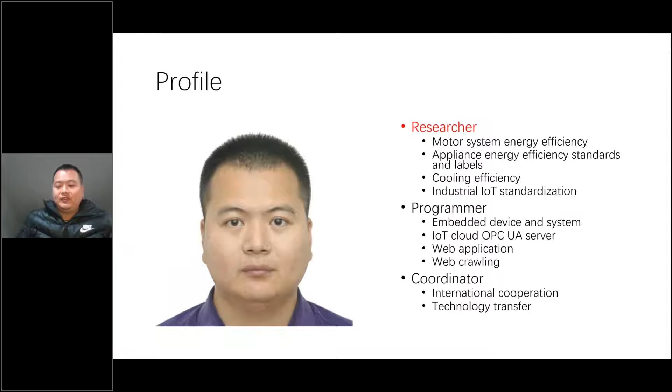But for today's session, I will see myself as a researcher. In the next few days I will be a programmer, and I hope that my presentation can benefit your thinking.

And this is the table of contents I'm going to introduce. The first one, which I already highlighted yesterday, is that motor efficiency is the key approach. That's what I always highlight, and not only me but also Conrad and Rolf and other energy efficiency experts emphasize that motor system efficiency is a key approach. Second, from my understanding, is training.

I think training is the most cost-benefit method to improve motor system efficiency in industries or nationwide. I'm going to introduce a smart pump demonstrator, a good case of international cooperation between China and Switzerland, and give you detailed information on our Smart Pump Demonstrator platform. Then I'll show you the real case, how we can use the pump demonstrator to improve pump system efficiency case by case.

Finally, I will introduce a very innovative international cooperation pattern between China and Switzerland, with national cooperation and local research and development support between the two countries. I hope we can continue such innovative international cooperation in future between China and South Asia region countries. That's a summary of what I'm going to introduce today.

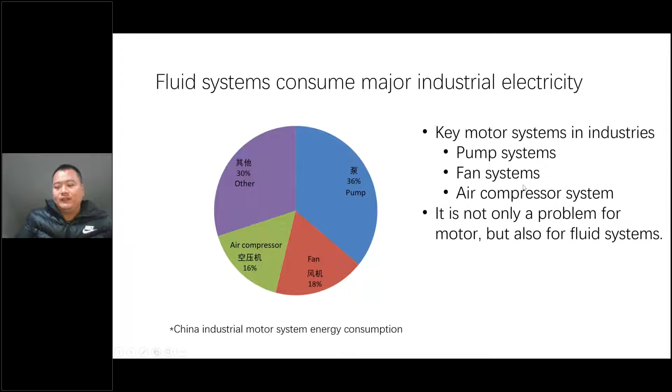This is what we call the system approach, which is a key factor. Motor plays a key role in this process because it's the boundary between the electrical world and the mechanical world. As Conrad mentioned yesterday, it's the split line between IEC and ISO - IEC is responsible for everything related to electricity, and ISO takes the rest. ISO and IEC are working together on motor system efficiency, and I think Conrad is taking the lead for this project.

Then the fluid - water, air, or other liquids - goes through the pipeline, controlled by valves, and finally reaches the end consumer to remove heat, or the compressed air can execute actions and finish whatever job it needs to do. That's the whole chain, and we have to analyze the whole chain to improve efficiency.

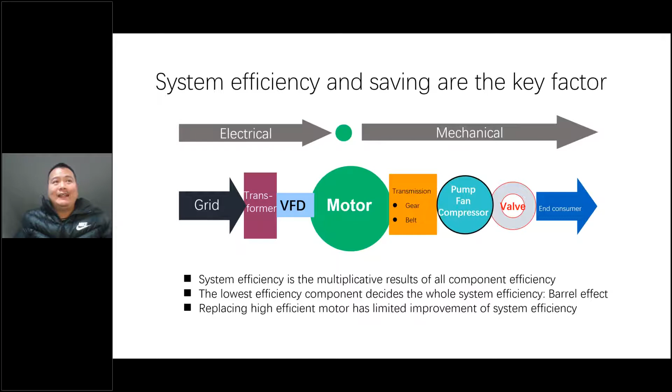And that's the efficiency classification difference between those supreme or normal motors. So that means the improvement of efficiency of the motor is quite limited.

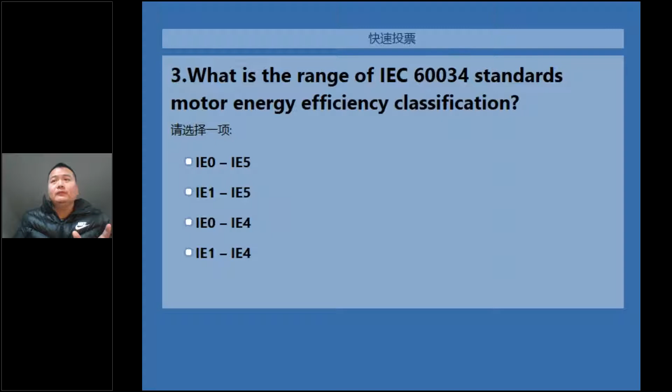I think that's what I always want to highlight in past presentations. But the information I want to send to you is in the last sentence below: considerable energy saving can be achieved at low or even no cost.

That means through training and management, not just by replacing the inefficient product with a high efficiency product, because that requires a lot of initial high investment cost. We have to think about the low or no cost approach.

The next step is how to achieve the goal at low or even no cost. I think, from my point of view, it's effective training.

We did training in factories for the last several years in my city, and also a lot of international trainings. The training with you is one of them.

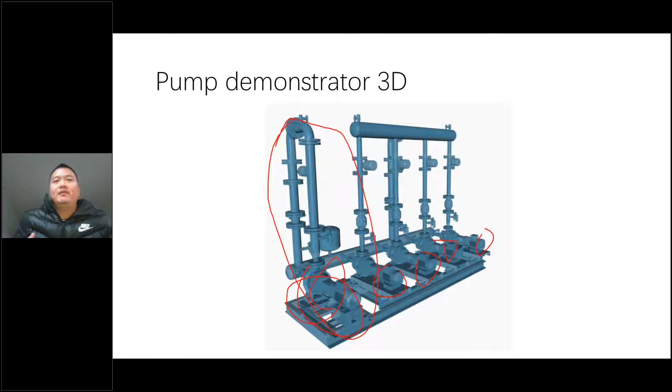That's the introduction of the pump demonstrator, the China version, and this is a 3D model. Maybe this is the real stuff, and this is the dimensional 3D. This is a big pump, and also 4 small pumps in parallel. This pump can run independently because it can run without any problem. Those 4 pumps, in industrial applications, especially for such kinds of ventilation circulation systems, we have not just 1 pump but multiple pumps, giving us the chance to introduce this kind of simulated industrial operation mode.

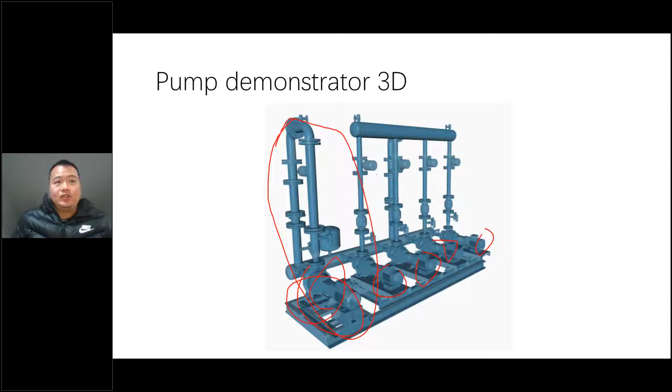Then we can disclose the facts to the students or trainees. Here are small meters, and this is a general pipe for the small pumps. This is a basic design, and also our innovation is called digitalization and standardization.

First, we choose smart meters and sensors. For VFDs, we choose ABB VFDs because we can connect with a Modbus port to sample the data. Then we have a smart flow meter, smart pressure meters, and smart power meters. I'm going to introduce it to you later, maybe not today, I think Thursday. Then everything will be connected to a data gateway.

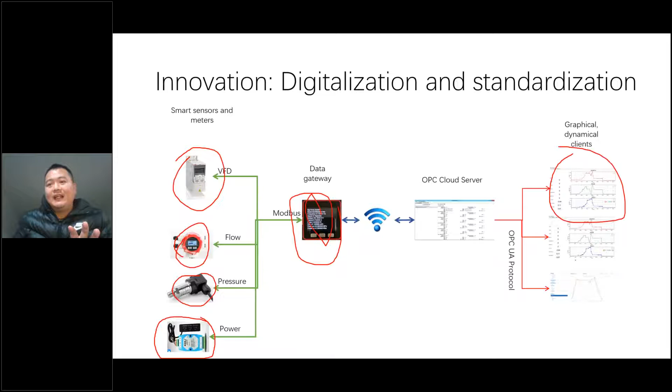We developed a data gateway by our own. Then we transfer the data via the Wi-Fi network to the cloud server. The cloud server receives the data, puts it into the OPC modeling, and then publishes the data to a graphic and dynamic client. This is the professional client, and this is the web client. This is the whole chain of digitalization.

Today I just bring you the framework of what I did in recent years, but in the next sessions I will introduce some specific technologies, especially how Modbus is implemented, and also what the OPC architecture means. I'm going to introduce that later.

I'll check the time now, already half an hour. We built a globally accessible web portal, meaning that from the web portal you can monitor and also manipulate the system remotely.

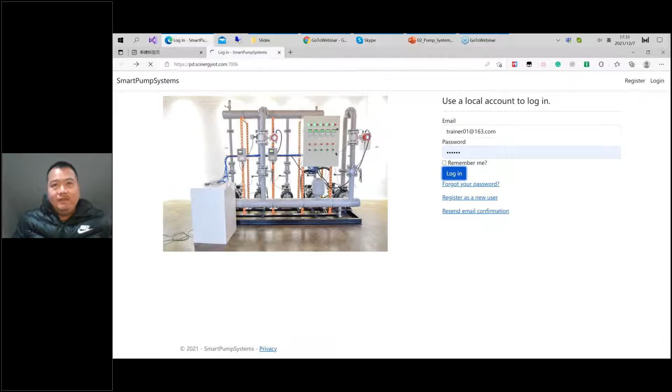First you can find the introduction of the pump demonstrator in text. I explained everything in this short text. And then we can start experiencing it.

Right now we have the instant status. You can see we have the meters, instant meters. We can see the hertz, meaning the frequency of the VFD, and also we have the VFD's power, the flow meter, and the pressure from the pressure meter.

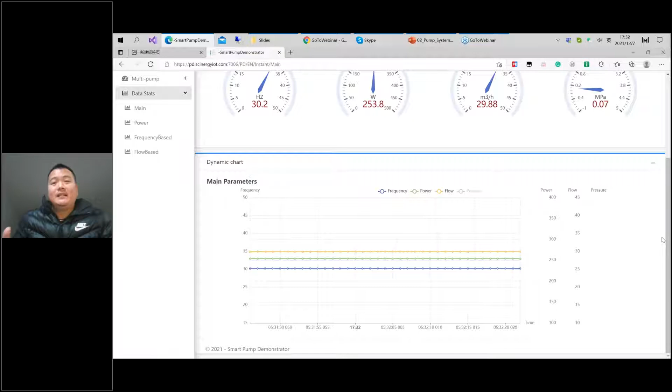On the ground we have the dynamic data, because right now it's not really connected, as this pump demonstrator is migrating from one place to another. I donated this pump demonstrator from my company to my university in my city, so we are migrating it from one place to another.

But here is the difference: for the trainers, we have the management function. The first one is gate management. We don't have the management data, and VFD operation.

But actually, if the real pump demonstrator was connected to the server, I can change the frequency here. Then if I send this, the frequency of the VFD can be changed remotely - that's remote control. I can also turn it on or off, because we have 5 VFDs: one for the big pump, and four for small pumps 1 to 4. That means we can control the VFD.

Second is the PID control. It's not developed yet, but for PID control, I think we can maintain the flow at a specific level. PID control is a very classic automatic technology in industries.

I assume a lot of you already understand what PID is, so I don't want to introduce it in detail because it's a quite broad topic. But from my point of view, PID control is the most useful automatic control in industries. I will introduce it later.

We can also use the simulator, because right now we don't have the physical operating machine, but we can simulate different cases since I already recorded the data from previous operation.

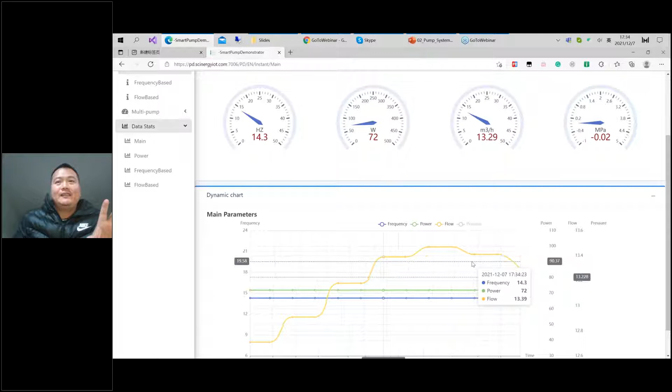The data is changing. We can see that the flow goes up, the frequency goes up, the power goes up, and we can also change the pumps here. Right now the data only applies to the big pump - for the small pumps, it does not change.

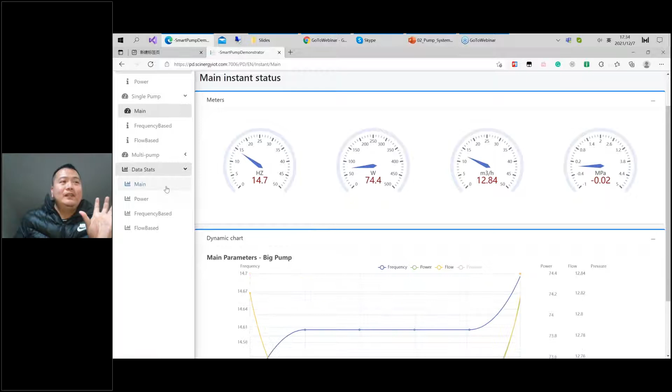We have the virtual meters - you can see the flow goes up. And here is the instant data. That means we have a virtual control panel of the motor systems.

Right now I stopped it for a while, and maybe later it will go up again. I changed it because we recorded that phenomenon maybe a year ago - right now I'm just replaying it. We want to illustrate that when the frequency goes up, the speed goes up, the flow goes up, the power goes up - and what's the difference?

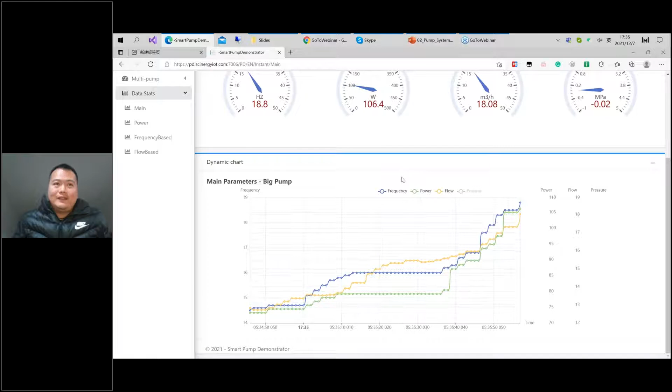I'll show you later, but I just want to let you know this is the training facility with instant data, and we also have the data stats, meaning we can have statistical data. Here we can see that in the last few minutes, the phenomenon of frequency changes, and also power and flow going up.

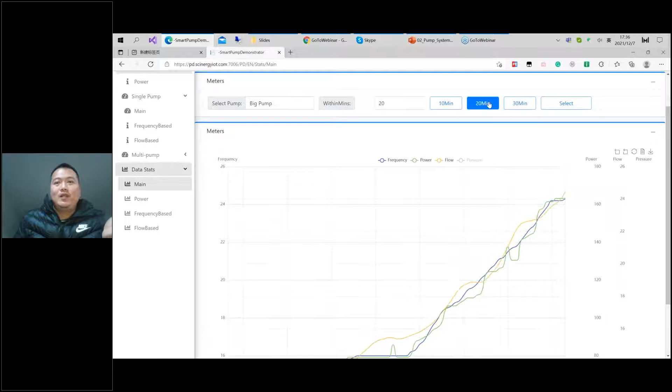If we refresh in 20 minutes, it means in the previous 20 or 30 minutes. But if I change the pump to pump 1, there's no data there. If you change to the big pump system, we can see it in 10 minutes, in 20 minutes. And then for this, we can zoom in to get a detailed understanding of the data.

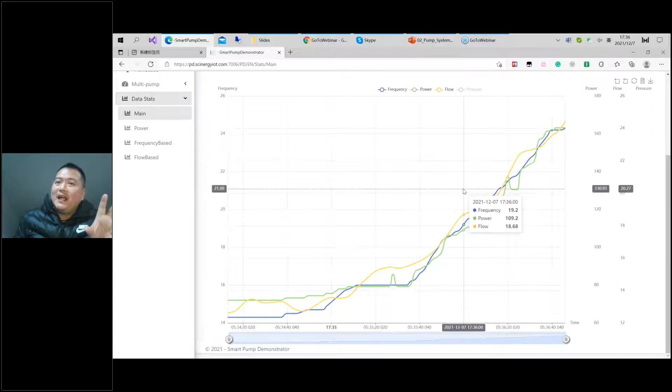We want to know something behind the data, so we can show the data view - that means how the data goes up. That's the raw data of the chart. You can export it to Excel for further analysis. I think that's an advantage of modern technology and also the IoT technology.

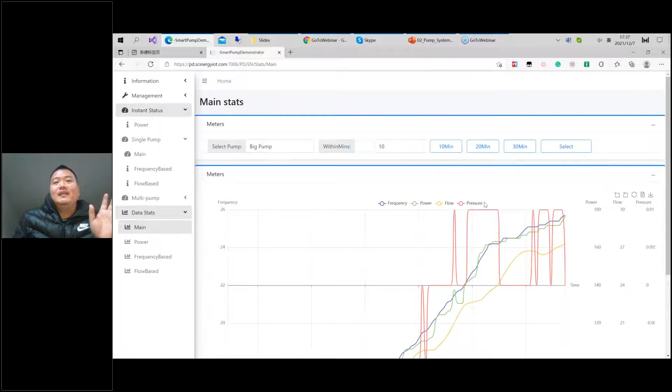I'll go back. It's a web platform because the pressure meter is so strange - the accuracy of the pressure meter is not as precise as possible, because if we want a very high accuracy pressure meter, the cost is really high. We cannot afford such a high cost pressure meter. So we decided to use a cheap and acceptable pressure meter to get the data.

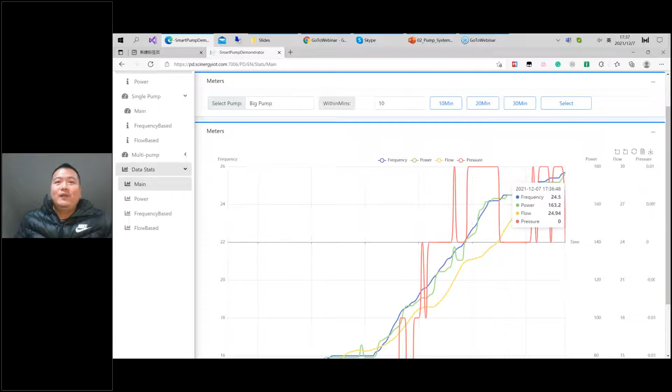Then we can also turn it on, turn it off. Here is the legend of the line. If you don't want the frequency, just click and the frequency will disappear. And also, if you don't want to see the power - and if you see the power, okay.

I think this is a very good training facility. I hope that you can experience it a little bit, and then you will find the message - more message on that side. Then you can train the people with the training facility.

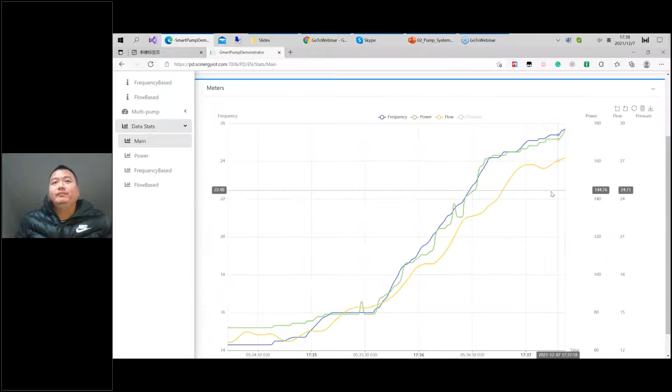But for the normal user, you don't have that option here. That's a management function, and you have to contact me to authorize you as a trainer. Then you can use this system as a trainer.

The most important thing is to change the simulating curve of the system, because one curve takes about 10 to 15 minutes. Right now we have about 9 to 10 cases. You can use these 9 to 10 cases to train people to better understand what a real pump is. Okay, this is a training facility.

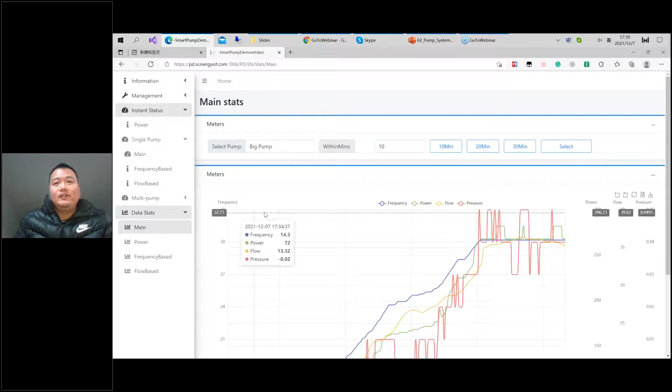I will leave it alone for some minutes. Then we can find the very good curves of system operation, and then we can explain in detail. Actually, I took this classic example of how first the pump goes, the frequency goes up, everything goes up.

Then I keep the frequency and use a valve to control the flow. You can see the phenomenon - how if we change the valve, how the flow and the power change. Then if I change the frequency again back to 15 hertz, how the flow and the power go down. Then we can really experience why VFD can save energy by changing the speed.

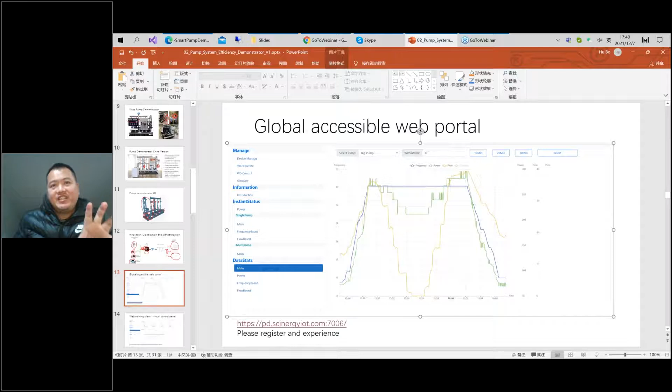Okay, this is the web portal, and this is the virtual control panel. Right now we have about 50 trainees. 50 people can see the screen, because we cannot use webcam live video for each meter to all of you, but we use this kind of virtual control panel. You can experience the real operation of the system.

Let me show you - this is instant data. You can see it's like a virtual power, virtual gauge. Okay, interesting.

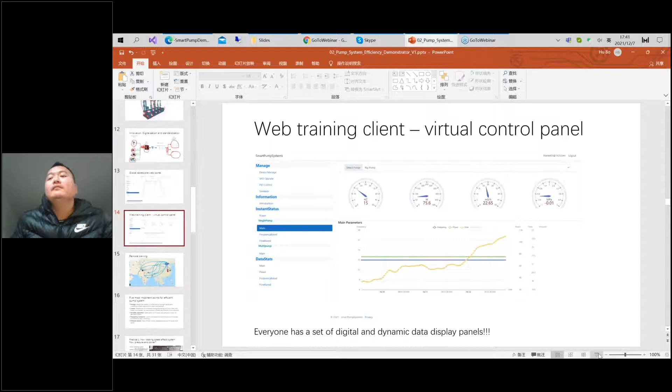Then we have the real capacity of remote training. Let me show you geographically - this machine is located in Zhenjiang, a small city near Shanghai, in the east of China. And I'm the trainer, located in Zhenjiang, but my cloud server is located in Beijing, maybe somewhere else in the world, maybe Hong Kong or Shanghai again. But I provide you a web portal - everyone all over the world can access it.

Here in Pakistan, you can have trainees from India, from Nepal, from Bangladesh. And also in future, if you are the trainer, we can have a trainer in Pakistan or India use the training facility in China to train people in the South Asia region. Of course, in future you can build your own training facility physically in Pakistan or India, and train the people at the local regional level. I think that's the concept of trainer.

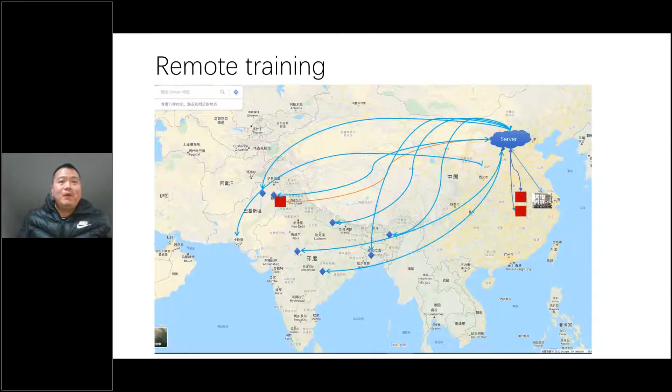So today I'm not only training people on pump demonstration, but also on the concept of how we can train trainees in future. You will be the trainer in future - I hope that you will be the trainer, not only trainees, because we cannot train people by our own, one by one. We have limited capacity.

After the training facility, right now we go to the efficient pump system. I took these 5 points from the training material on pump system efficiency - we summarized the 5 most important points for a very efficient pump system. The first is design.

A lot of designers or pump system designers always oversize their product. But the most important thing is we have designed the system in proper application conditions, because we have to decide the water requirement and head requirement for the system. Maybe at the very beginning we cannot get the requirement precisely, but after the facility has been in use for years or some months, we can figure out the real demand for the system and consider redesign. Redesign is most important to improve system efficiency and energy conservation.

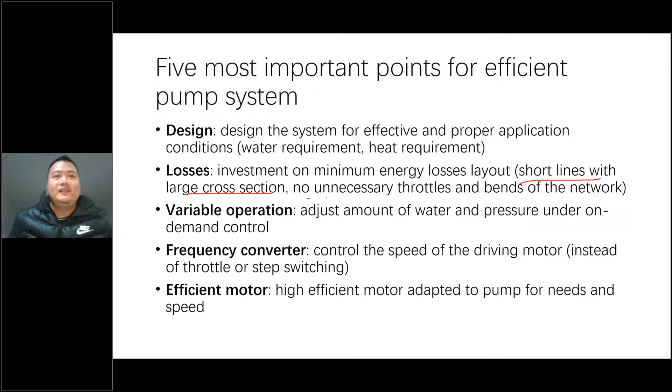Second, we focus on loss. We have to invest in a minimum energy losses layout. Here we don't touch anything about the pump or the motor, because we are talking about lines, the pipe network, cross section design, to cut the number of throttles, because we control the valve and also the bends of the network. We have to reduce the loss as much as possible in the network. We won't mention the system again.

The third one is variable operation, because in a lot of cases, due to temperature changes with seasons, daytime and nighttime, and different production demand, the demand from the pump system also changes. That means the pump system has to be operated under variable operation conditions, so we have to adjust the amount of water and pressure based on demand control. The best or most popular solution currently is VFD. I think the ABB colleagues will introduce this later today or on Friday.

Finally, we have frequency converter control. We control the speed of the driving motor. We don't have to use throttle or step switching to control the output.

The 5th step is we have to replace inefficient motors with efficient motors, because we can use a high efficient motor adapted to the pump for the load and speed. Later I will explain. Right now, I have one question for you to consider: can we achieve the energy conservation goal by replacing an inefficient motor in pump systems with a high efficient motor? You can think about yes or no, and later I will disclose the answer to you.

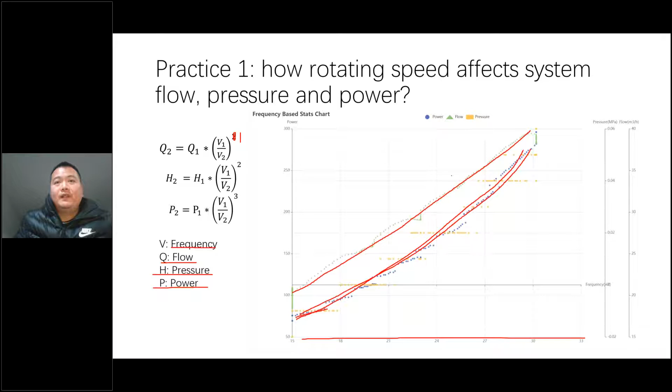With this you can see the blue dot, and the x-axis is frequency. I think the blue dot and the green dot represent the flow going up. Then the pressure, even though the accuracy is not very good, still goes up, and also power goes up. Okay, and this explains this phenomenon.

The second question is: does replacing an inefficient motor with an efficient motor save the expected energy? For the pump system, I think my answer is no. Here is one example from the pump demonstration show.

Here is the operating status when the frequency is 20. At this frequency, the power is about 130 watts and the flow is about 30 to 30.3 cubic meters per hour. If we replace the inefficient motor with a high efficient motor, normally the high efficient motor has 3% higher speed. That means the frequency of the system will go up by 0.6 hertz. Then the flow goes up by 0.3 cubic meters per hour, and the actual output power increases to 141.

That means right now we have 12 more watts of power consumption if we only replace the motor with a high efficient motor for the pump system - only for the pump system, also for the fan, but not for the air compressor or other mechanical motor systems. For the pump, for the fluid system, replacing an inefficient motor with a high efficient motor causes the rotating speed to go up, meaning the total output power goes up.

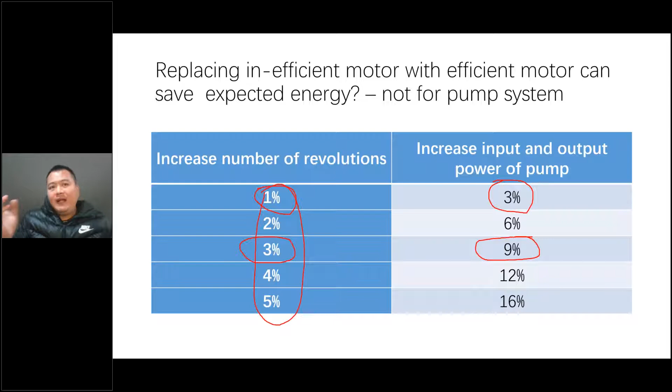It's from the material - that means the increased number of revolutions for motors could normally be 1 to 5%. The increased input and output power of the pump is not linear, it's a cubic proportion. If we increase the rotating speed by 1%, the output power will increase by 3%. If we increase this by 3%, then the power increases by 9%. Actually, I invite you to make a general calculation.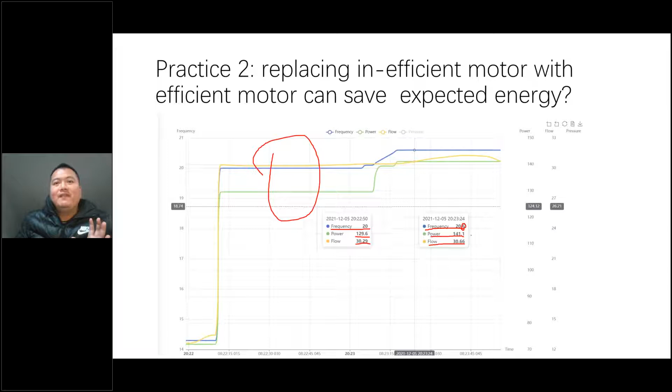Now, how does valve control affect flow, pressure, and power? We have different sections here. When the frequency - the blue line is the frequency - goes up, the flow, shown as the yellow dot, goes up, and also the green goes up. When it reaches 30 hertz, because this is a laboratory I don't want to reach the limit of 50 hertz, I think 30 is good enough for demonstration. Then I stop changing the frequency.

Then I start throttling this, using a valve. The opening rate goes from 100% to 90% to 80%. Then it goes down, down, down, down. Finally I almost close the flow, throttling it all the way to zero flow. This flow is zero actually - this is a line at 0 here.

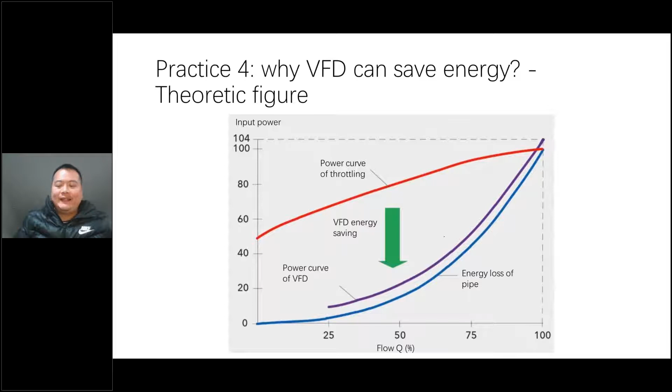Theoretical figure - Rolf showed this figure yesterday with some theoretical analysis. He explained this in detail, so I don't want to repeat again. But this is the real world. With the pump demonstrator, we can show people how the energy can be saved. This is the line of the VFD, this is the line of the throttling, and the difference here is the savings. We have a similar curve, but not the same, because theoretical and practical have differences.

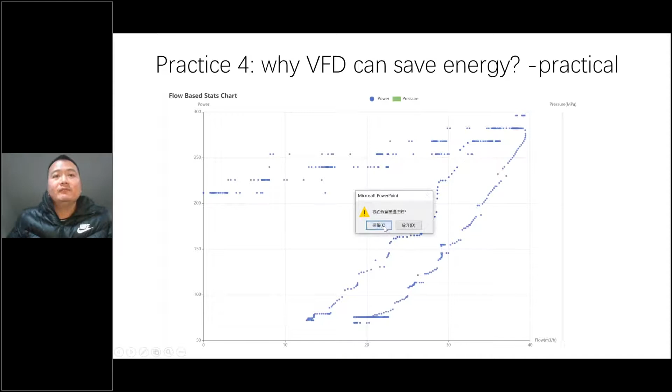Okay, and this is a new version. It's a new version actually. Right now I think our system here is operating in a quite well situation. I think we can repeat this curve again. Okay, right now we have the pressure. We can see that when we use VFD to control the system, the pressure goes up, and then the pressure stays the same, and then when we shut it, it goes down.

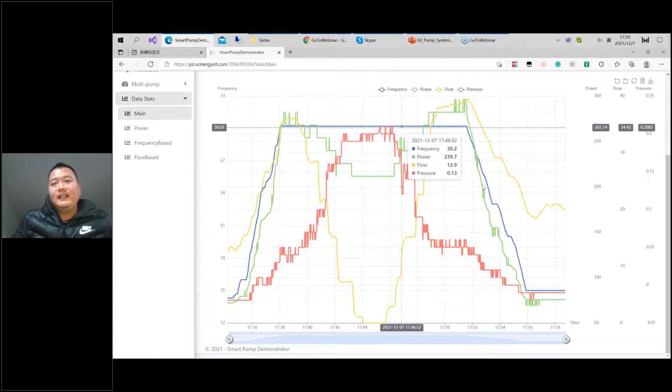It's almost the same. I just made a screenshot of this phenomenon, and here you can have some data to show you. At this point, you have frequency of 30, power consumption 239.7, and here you have the frequency of 15, and also the power down to 75. The frequency only changes 2 times, but the power goes down 4 times. It's not theoretical, it's practical. It's from the recording of the system operation.

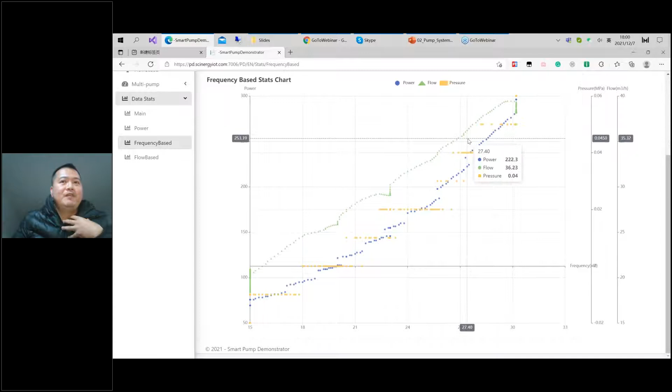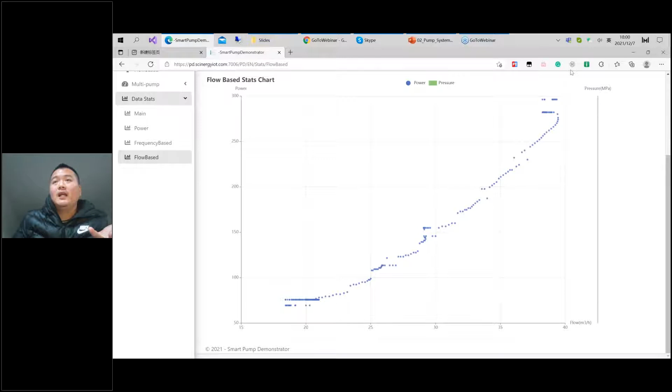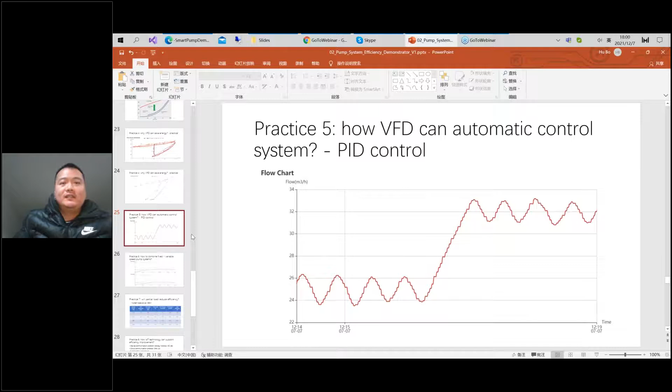Okay, I think we demonstrated practice 4, and also this is practice 5 - how VFD can automatically control the system. That's PID control. I didn't include this for the phenomenon, but I can explain: I set the system like 25, then the VFD will change its frequency, trying to maintain the flow around 25. It goes up, it goes down, goes up, goes down.

Then I change the setting to 32. Then it goes up, step by step, by 0.3 Hertz. And then when it reaches the target flow, which is 32, it will keep like a very regular curve. You can see that the PID control always tries to maintain your system in a stable way, because the control interval of this is about 1 or 2 seconds. That's why there is always a plus minus 1 difference between different points.

Plus and minus 1 difference. But if we want to control the flow in like 8 to 10 seconds to change the frequency, we have to change the parameter. We can see that the curve will be almost flat. I didn't record the data this time, but I'll just tell you that if we change the parameter of the PID control, then you can have a very good, stable control of the system.

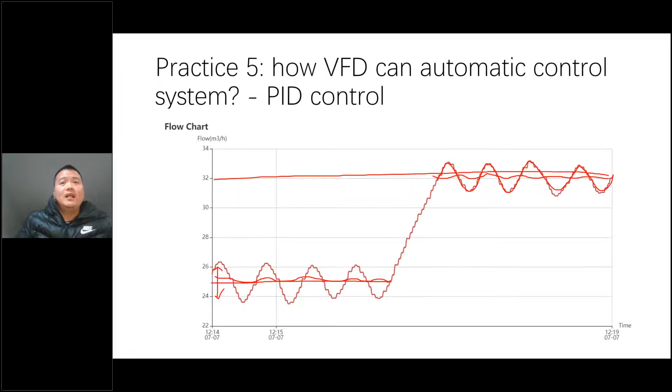I think this is the process. I think the last one is - because right now we only illustrated for 1 pump, but actually we can use multi pump. In a lot of cases, we have 1 constant pump, a fixed pump to provide the base load, but we have a variable pump to provide the variable speed control to meet the variable demands of the system. And right now we have 2 pumps.

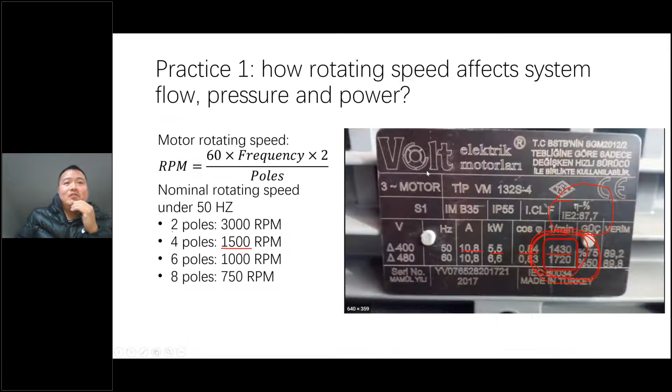That means our system adapts, we have some base load and also some variable load. That's a good combination of the system. We can also demonstrate this with numbers, with pump 3 and pump 1.

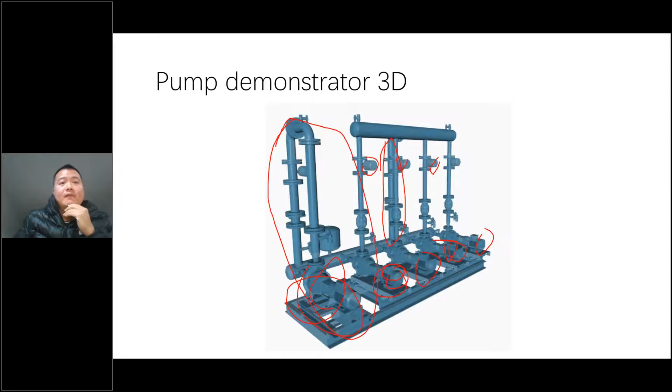This is the flow, and I think the power will follow the same phenomenon. Here is the base load at about 150, and then we have the changed load, about 50 watts. In combination we have almost 200. The difference is because of the metering, the accuracy of different meters, since we measure flow and power individually and then put them together to calculate this out. I think that's how fixed speed and variable speed can combine together to provide flexible load for the pump system control.

Practice 7 is the question: will partial load reduce efficiency? I observed from my analysis that I have one big pump, and we change the frequency from 50, 25, to 15 hertz.

Then we get the VFD input power, and we can calculate the load of the VFD. It's very, very small because a frequency of 15 is really, really low, not practical - it's just an experiment. Then we have the VFD output power, and we can calculate the loss and roughly calculate the VFD efficiency. Actually, the VFD efficiency at a very low loading factor is really low, only 40%.

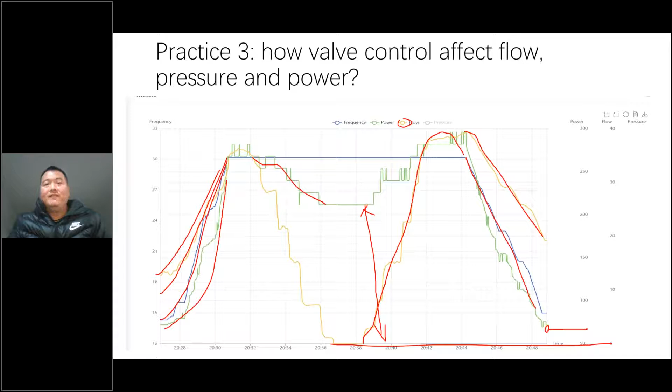Like Rolf mentioned yesterday, when your loading factor is high, the equipment efficiency is high. But when you are outputting a lot of flow and pressure unnecessarily, you are wasting a lot of useful fluid energy. So the first step is to resize the demands of flow and pressure, then you can achieve savings. But from the equipment efficiency point of view, it might decrease. It's something of a paradox, but I want you to know it is a fact.

Practice 8 - I'm not going to go in-depth on how IoT technology can support efficiency improvement, I'll introduce that in the later sessions. Our digital demonstrator already showed the advantage of IoT technology in training, because we have to learn device communication protocols - analog, Modbus, I2C - and also go further for cloud communication protocols like OPC UA or MQTT.

The first one is system status or condition monitoring - I think Conrad and Rolf mentioned this, and ABB colleagues will introduce later their solution for status monitoring. Second is remote control. If the system is in operation, I can turn it on and off, change the frequency, and set the PID target control point remotely.

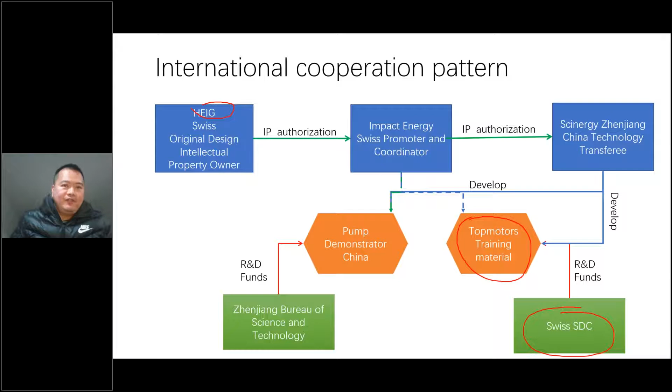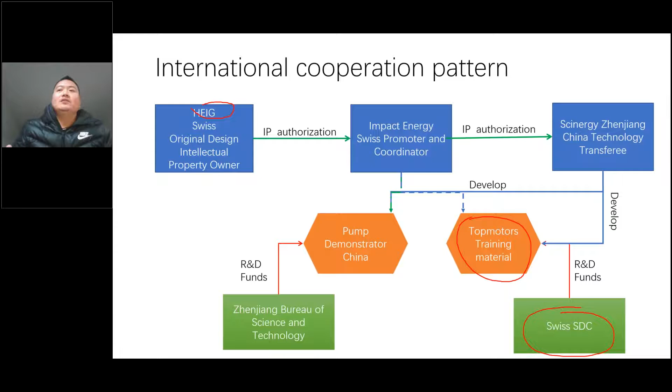Based on such development, we built an innovative pump demonstrator available for international training, like you. Of course, as I mentioned to Tula, the organizer of this event, we are open to transfer the hydromechanical design to partners in the South Asian region. If possible, you can contact me or contact us via the SAARC Energy Centre. I think we can discuss further cooperation in the future. We can transfer the hydromechanical design from Swiss and also the China version to all of you. You can build the pump demonstrator at least in your country, and also share the 3D materials from us. I'm quite open for cooperation, and this is my contact information. You can always reach me by email.

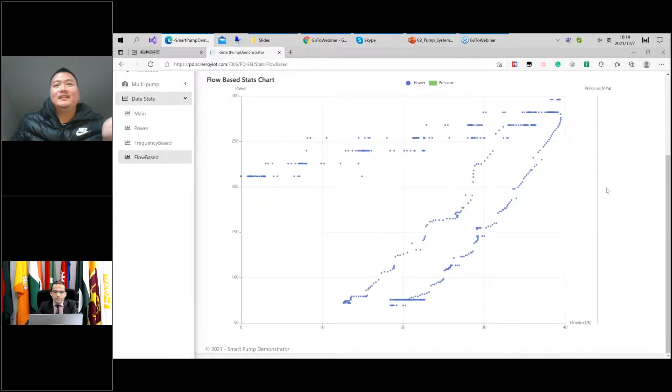Maybe finally, we can go back to the pump demonstrator. Let's see what happened - you can see it draws the same curve as in the presentation, but we want to present it in a dynamic way. I think that's our approach. Of course, we have to experiment with the pump demonstrator for a long time, especially since we have nine curves. Actually, I didn't show you the parallel pump operation curve - that means multi pump operation - because of the time limit today. But I think we have enough time for further communication in the future. Okay, that's all the introduction from my side.

So I'm ready for the questions.

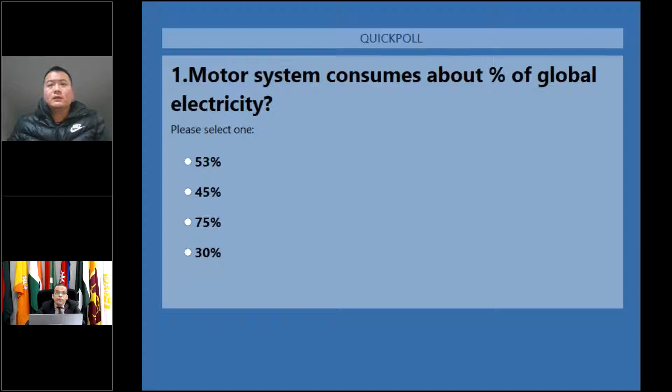Okay, thanks. Here I'm now going to launch question number 2 for you.

Now question number 3. I'm not able to see it.

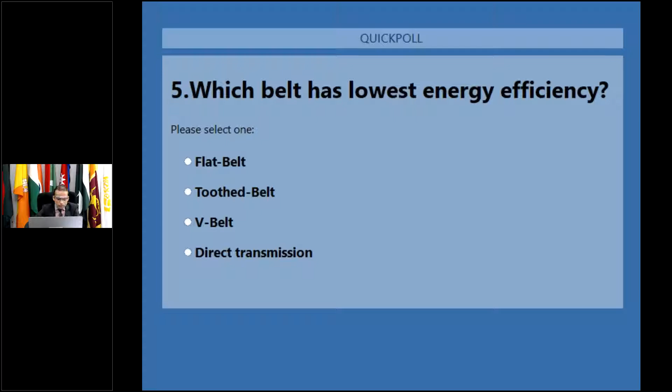And the last question, question number 6, is now on your screen. I mute the... nothing, okay.

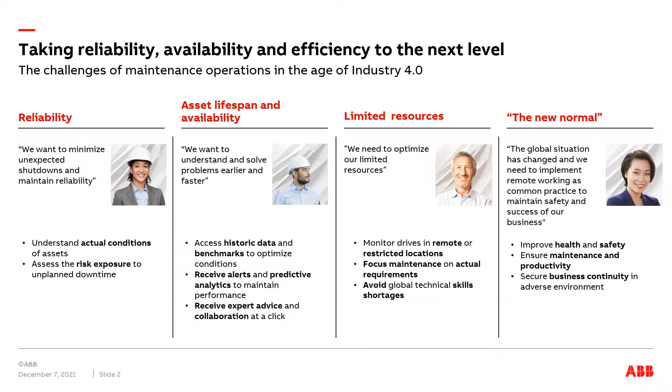But then, what is the value of digitalization? Digitalization is a word that is used today in many different contexts. And what we have learned also during our journey in digitalization is that this is something so new still that people have really not thought through the whole process—meaning, what does it require from different stakeholders when you do the digitalization, and what is the value that it will bring you?

Here we come up in the discussion with the customer, first of all, where should we store the data? And then what are we doing with the data, for example, if it's only stored on a local computer or a local server? What is the accessibility of the data? Who will use the data? And can the data be further developed for bringing value to the customer or the user?

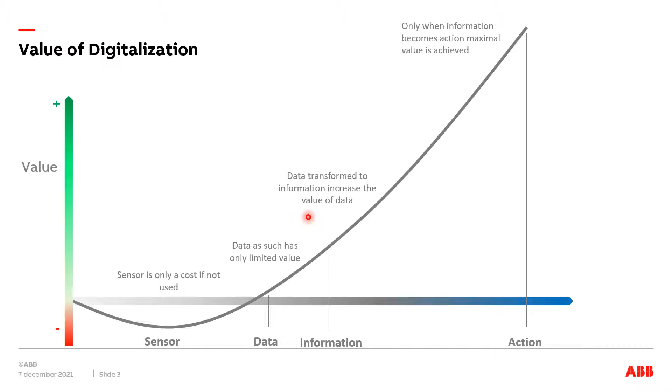So what I claim to say is that when the data is transformed to some kind of information, it increases the value of the data, but it's not actually bringing the big value yet. It's only when the information becomes an action that the maximal value is received. And how do you get the information to be an action? For that, we need to have tools, but we also need to have processes and, again, development among the users of the data and the information.

My statement is that to optimize the value of digitalization, the whole organization, the process, the work methods, and the behavior of the people need to be adjusted accordingly. So digitalization per se alone will not bring the value that it should.

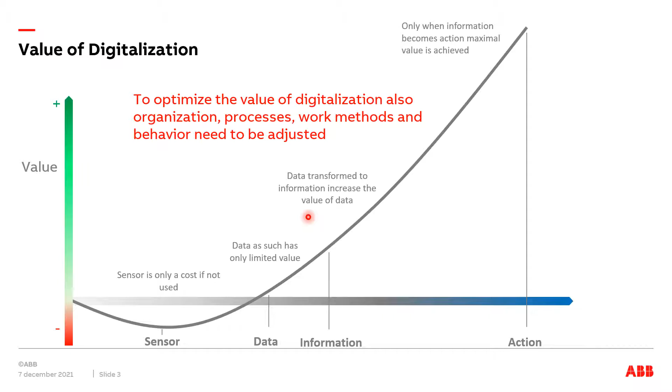If there would be no sensor, as the customer used to have, we can imagine the situation: nobody goes near the assets. This is a pumping station in a remote location. And when something fails, the user is surprised. He starts to look for a spare part or a spare motor in his warehouse. Then he starts to look for where to find an electrician, and beg them to come as soon as possible. He needs to arrange lifting gear in place in a hurry. So it will take days, at least a day, even more, even if you have a motor in stock. And this, of course, time and cost can easily spiral out of control.

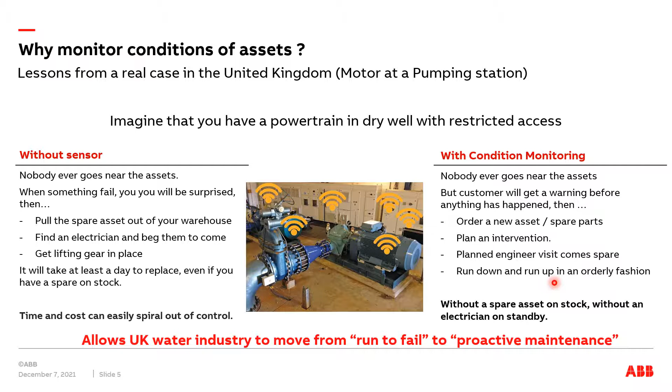Then the customer started to really monitor the motor and the drive, and the situation changes dramatically, in the way that nobody has been looking at the motor there, but the customer will get a warning before anything happens. He could order a new spare part if he didn't have it in stock. He could plan the intervention in time. He had reserved the engineer to come and do the job, and he can run down and run up in an orderly fashion without interrupting his production or the water supply for the community. So very simple, but a huge impact.

So then extending the whole discussion to what we call the powertrain. The powertrain in our view can consist of these elements. A powertrain as such does not need to be a motor and a drive and a pump. It can be different kinds of assets. For example, if it's a motor and a pump, then we call it a drivetrain, or powertrain, sorry.

In today's offering, we have the sensors as such. If we start from the pump side, we will have a general machinery sensor that can monitor different kinds of rotating equipment. We have the bearing sensor for the bearing housing to analyze the bearings between the driven object and the motor. We have the sensor for the motor itself, and then we of course have the drive, the frequency converter, where we have the monitoring and the gateway for that data acquisition.

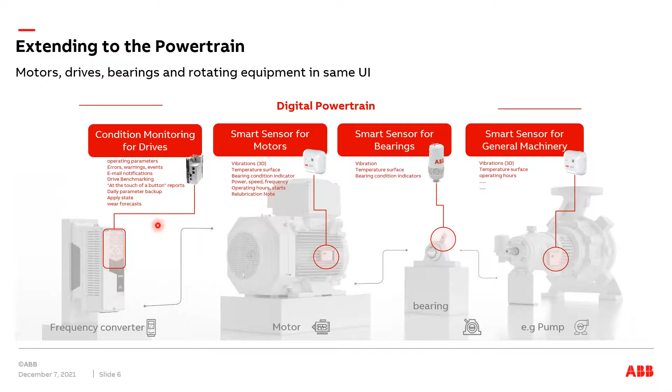And how does it work actually? We have to remember when talking about digitalization, there are rules of thumb to make this happen. It has to be easy, it has to be economical, and it has to be scalable. And the solution in our mind for that is that you need to have a system that is self-maintained.

Self-maintained in this respect, how we see it, is a little bit like your mobile phone. You don't need to have an expert coming home to you when you are taking a new mobile phone into use for your personal things. So you have to be able to do it yourself, and quickly. Otherwise, you will lose patience and money, and it has to be scalable for many assets at the same time.

So what this means for us is that we have the customer environment here where you have different kinds of assets. I'm just mentioning the drive, the motor, and the bearing, and you connect these with a sensor and data acquisition equipment. That first of all has to be easy and economical, so you have to be able to do it yourself without bringing experts on site.

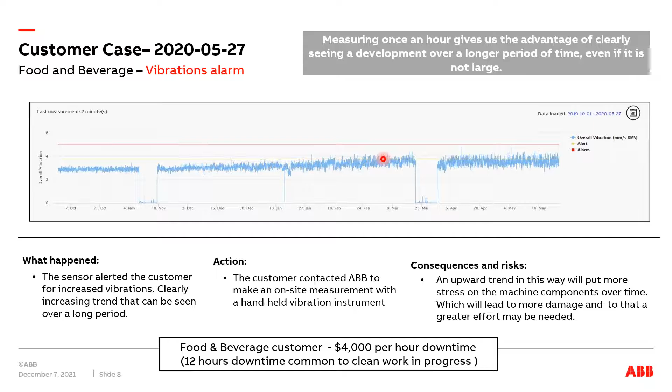So what value does this service then deliver? I have usually categorized the values into 3 different areas: convenience, optimized maintenance, and also peace of mind for the customer.

On the convenience level, we are providing full access for the customer to see the status of his assets over mobile or in the web portal, and we are able to deliver reports and recommendations for the user. This will bring proactive and predictive maintenance based on the historian and the trends I showed earlier, and we can also look at the analysis of outliers and anomalies that will predict the status of the assets over a longer period.

But in the end, the most important thing is that this gives you a faster response and protection by having an asset that is talking to you. It brings you errors, limits, and thresholds, parameter changes you can do remotely, and you get automatic email notifications if something is wrong. And of course, you have access to experts also, and you can look at the same data together with the expert and get recommendations.

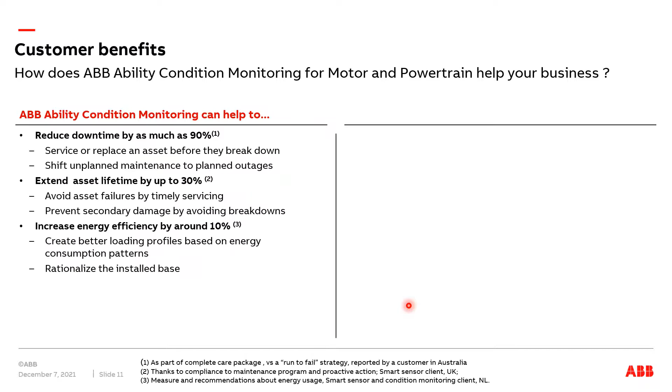So here are just a few examples from our customers that they have stated. Some customers have been able to reduce downtime as much as 90% with very simple monitoring. Asset lifetime has been increased up to 30% by understanding how you are really operating your devices and doing small changes in the processes, increasing energy efficiency, and that is happening.

I will come to that later in my presentation. So we see customers saying they have reduced unexpected downtimes, either on an hourly basis or by events, and reduced inspections by 66%, meaning they don't need to have so many people on the field anymore.

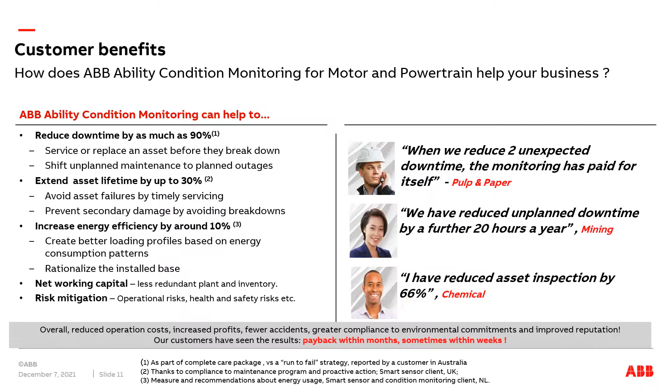So now I jump shortly into energy efficiency and digitalization, and what does it actually mean when you now have the possibility to understand what is happening through sensors. I would claim that you use long-term data to uncover hidden opportunities, and this is the difference between the new possibilities and the old traditional way to do it.

So we all know where this comes from. The world is evolving, and we have energy efficiency classes that were mentioned in previous presentations. We have the Paris Agreement, UN Sustainable Development Goals, and so on, converting combustion engines to electrical and so on. This is all visible, but then there are a lot of invisible, hidden things, like how much energy waste do we have on old installations?

Is there new regulation coming up? Yes, the answer is that there is, but what will it look like? And security concerns about sharing data and so on. These are all hidden things still for the major part of people. So we need to change our horizon and also uncover the hidden things.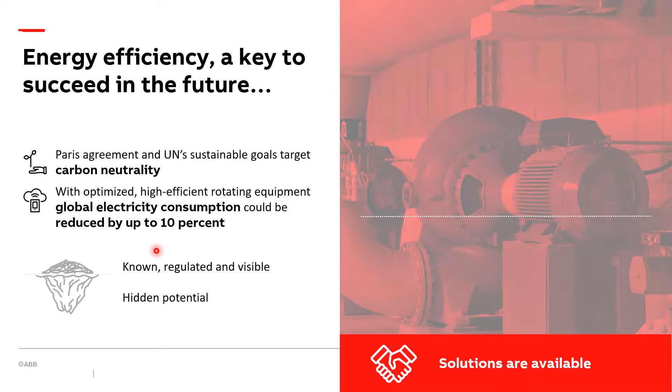Technology is already available, that is not the problem to improve the efficiency. Either we can, if we have fixed speed motors, improve by upgrading the motors to a better energy efficiency class, or by putting in a variable speed drive, where the energy saving can be even up to 70% based on how the motor is operated.

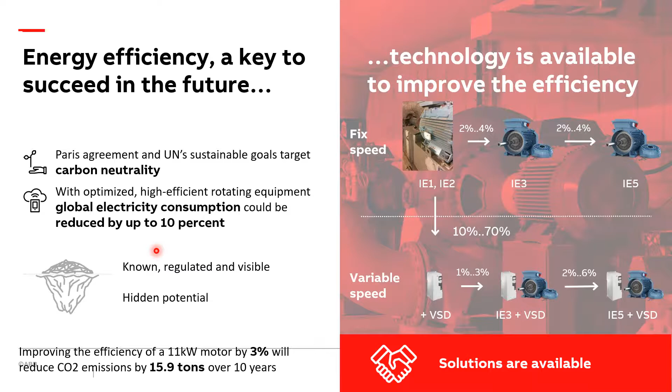If we don't know how the motor is operated, it's very difficult to estimate the energy saving and the return of investment. Why do we not know the motor operational performance? Well, typically motors below 100 kilowatts are usually never monitored in any way. So you know you are wasting energy, but you don't know where to start.

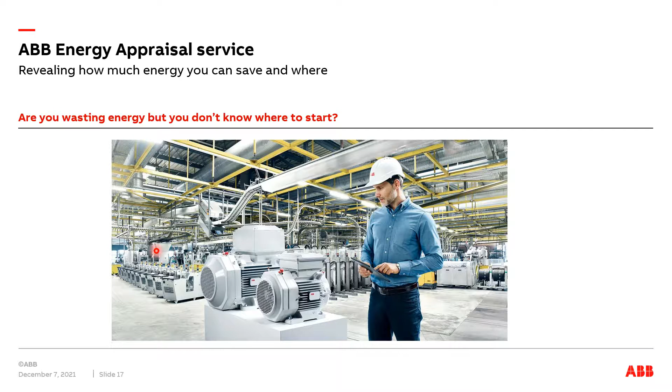I will present two different methods how this kind of things could start to be solved. Sorry, need to take some water.

So the traditional method, what is usually done? You go to site, you do some visual review of the installed applications. You and a partner, either ABB or somebody else, walk the site, and then you identify a pool of opportunities and target applications.

However, due to time and resource restrictions, usually these opportunities are narrowed down to a few motors and pumps, because there is a limit how many you can handle by manual interventions.

You need to do some kind of data collection. In this case, you need to learn more about what kind of pump and motor it is, and that is usually found by looking at the rating plate data of the motor. That is very often the rating plate of the motor when it's operating at its nominal point.

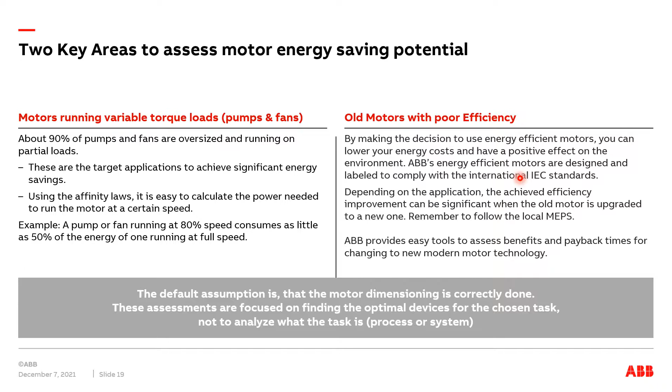So this is partly the traditional method how you do it, and this makes fully sense to do every time you have the opportunity there. But there is also another way to do it if you are considering better digitalized condition monitoring on your equipment. And digitalization, of course, brings one advantage to this by having data over a longer period.

So the key area to assess motor insights with digitalization is that you recognize the long-term trends. By measuring and getting data, you see over a longer term the condition of the motor and the drive. You get a better understanding by the recommendations, maybe from reports, alerts, and expert services, of what is the lifetime expectancy for the motor. Do we need to replace it already based on that, or could we combine it with energy efficiency calculations?

Leading to this, as I mentioned earlier, it has been quite cumbersome and expensive to measure smaller motors in real operation and their performance. Digitalization with a sensor or other methods brings us insights not only for condition monitoring, but also power usage and operation. This will uncover the hidden energy consumers in the whole factory, for example. It enables not only energy efficiency and sustainability, but also improved life cycle management, because you know the status and condition of your asset, and also its performance when it comes to power and efficiency.

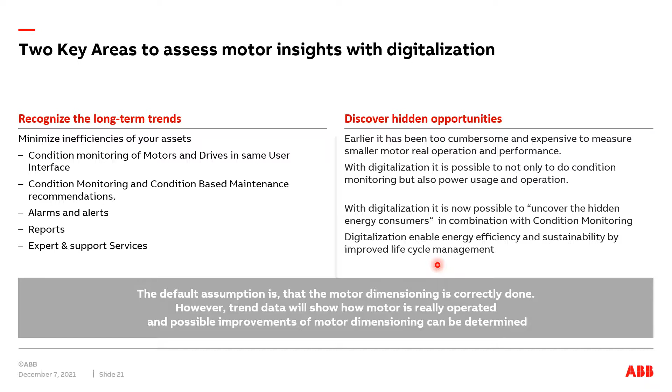Good. So this is pretty much the process for energy efficiency analysis using digitalization. It starts the same way as the traditional method, but when you do this kind of factory visit or plan, you can define which motors need to be equipped with a sensor so that you can get the data. You have better freedom to go down in sizes, because you don't have the same restriction when it comes to time to be on site.

Usually mounting a sensor takes something between 10 to 15 minutes per motor. You can then expand quite much more than doing manual energy measurements on the motor.

Then the data is usually collected for, let's say, 3 to 6 months to verify the performance and operation, finding out how the motor is operated and how many percentage of the nominal power is used. You get a better picture, also calculating reactive power, understanding whether we are losing money by paying the energy company in the bill for reactive power compensation.

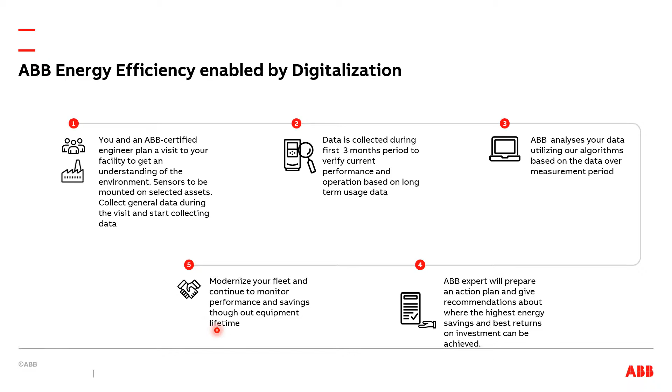So in our opinion, to really make sure that you are getting the most out of it and you are able to do energy efficiency analysis on the whole, say in this case a production facility, I think three more important things are needed. First of all, as I mentioned, it has to be plug and play. Otherwise, it will never make sense to analyze tens or even hundreds of motors in the same facility if it is too cumbersome and costs too much. So it has to be very easy and economical.

Secondly, the solution needs to be motor agnostic. By this I mean that the sensor, the data acquisition equipment, how you gather the data, and how you analyze it has to be made in a way that different motor manufacturers' motors can be investigated. It makes no sense to have a solution that only looks into, for example, an ABB motor or a Siemens motor or whomever the manufacturer may be. It has to be suitable for all motor manufacturers.

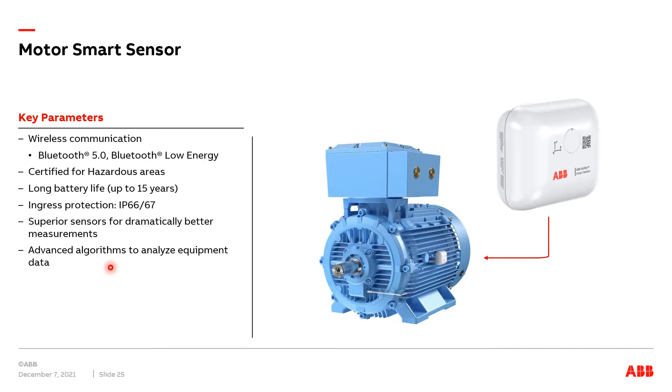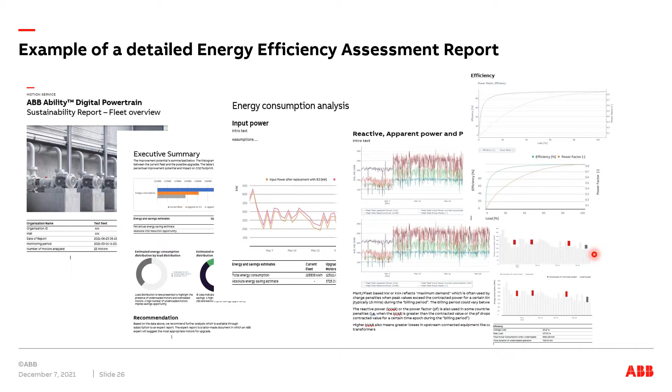And then we show, quite in detail for each and every motor on request, how the performance looks, what are the savings, for example, if you change from an IE2 to an IE3 motor. We also show the reactive power, and the operational profile of the motor, so that, for example, the customer himself can even optimize his own process based on the utilization of the motors. So this was in a nutshell my presentation, and I'm open for questions.

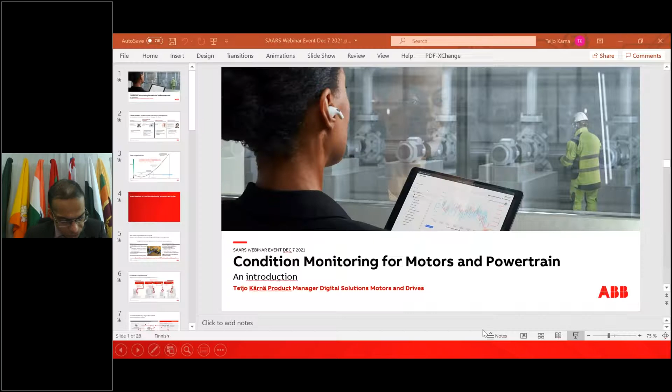Sorry, I cannot hear you.

I have one question for you, Teijo. Can you hear me? Yes, I can hear you. So I'm wondering, when we use the ABB digital solution, where the data has been saved in the ABB cloud, that's right? So how long will it be saved, or does the user have to pay for data access? Can they export the data from ABB's platform? I'm wondering, because a lot of third party service companies, consultants or experts like to take the data from ABB's condition monitoring for analysis. So how can we proceed with such a process?